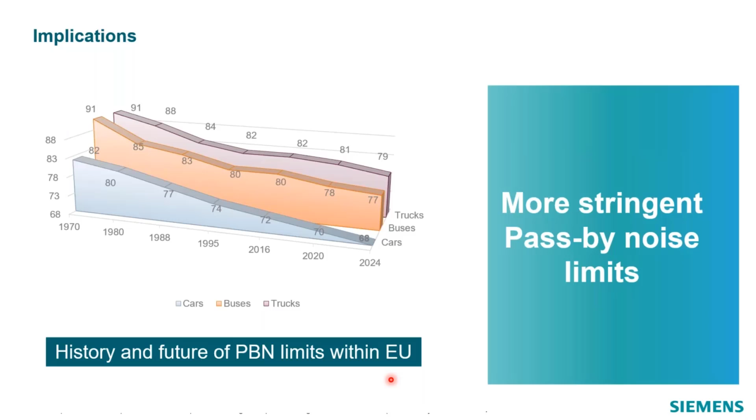Some positioning here. I think there's no big amazing revelation to anybody. Of course, pass by noise regulation values or levels have been going down over time. This is actually a fairly old plot, I think, even, but we know they've been decreasing in the EU, especially, and with changes both in different markets, worldwide markets, US regulations also adapting, things like minimum noise coming about. But all these changes really mean that pass by testing itself has gotten a lot more complex.

In fact, even the motorcycle testing I did had maybe a slightly more complicated standard where you had to reach a certain RPM within a certain range of the track, so it was almost like a box you had to hit with the RPM curve coming up, whereas most cars, you come to a position, wide open throttle, accelerate through the trap.

But of course, over time with these new regulations, there are things like you have to do ASEP testing, the number of gears, the power to mass ratio, the weight of the vehicle. All these things affect how the testing has to be run, and you need a lot more data to verify that you actually did do a good test.

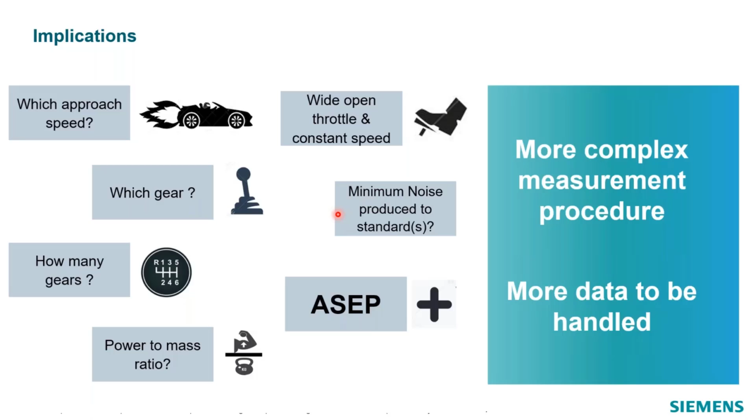Throw in there too things like new minimum noise standards, which when I first heard of that, I'm like, oh, wow, you must just have your car make its noise and say it's good or bad. No, it's a lot more complicated than that, right? There's moving tests, stationary tests, different ways to average. So the job that we have to do as pass by noise engineers has gotten much more complicated over the last few years. And really, there's a couple ways that we will break down this topic.

Like I said, we'll talk about efficient testing. That's both hardware and software, how we approach the actual data acquisition. But then also pass by noise engineering. And the difference here is that we want to be able to pick a standard, run the test, find out did we pass or fail, or what octave bands did we not pass, things of that nature.

But many times you have to do actual development work to figure out how to make the vehicle quieter, or maybe increase third octave bands if it's a minimum noise test. All these things go into pass by noise engineering. So the old put a sound level meter there and just get a single number is not going to help you get your job done in most cases. And that's what we're talking about here with increasing testing efficiency.

We review hardware for a moment because we have some very specialized hardware that we use for pass by noise testing specifically. Those of you on the call that are current Siemens customers are probably aware of this, the front end here. It's a SCADAS Mobile 05, portable system, AC/DC powered, can run on the battery for a while, has different slots to put in input modules for doing normal noise and vibration testing, field testing, things in the laboratory, etc.

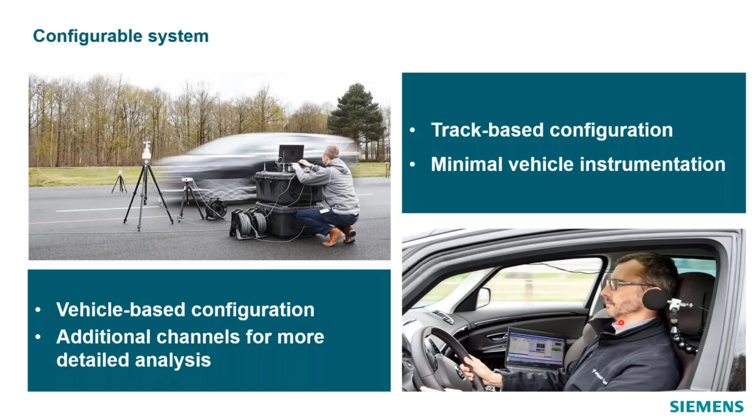Now you might say, well, but wait a minute, if the driver is actually running the test, that's probably not safe because the laptop's over on the side there. How are we going to handle that? How are customers allowing that? Well, we don't expect them to ever interact with the laptop while they're actually driving during the test. We accomplish that by actually having a wireless Android tablet application that shows up here, and you can see an example of putting it on the screen with a little suction cup, the feedback that the driver needs to run the test correctly.

Now, if we look at this bottom left picture here, you see that there's actually a target speed of 48 kilometers an hour in this test that he's running. The arrows are both green because he's within the tolerance, probably 1 or 2 kph plus or minus. If he was to go too slow, and maybe it's indicating over here 45 kph, the arrow would be red on the top, meaning he needed to speed up. If it was too fast, it would say, nope, you need to slow down. So without having to focus on this, the driver can look at the colors of the arrows, know if he's within his speed range, know if he has to speed up or slow down.

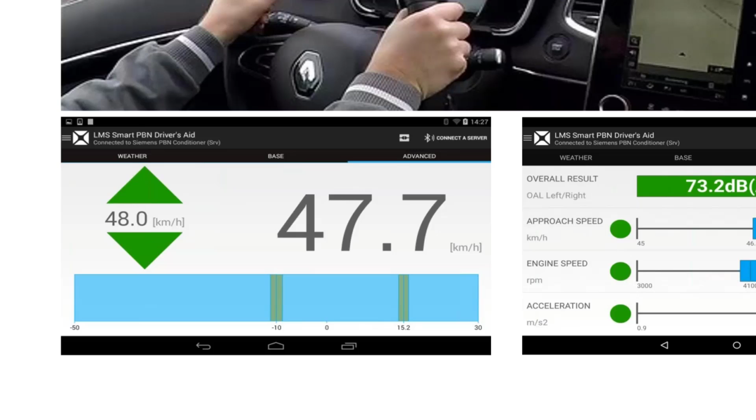In addition, when he hits the first light barrier, in this case at -50, a green bar will start progressing across. It'll literally move left to right and sweep over to that -10. And there's an audio tone that gives him a countdown, beep, beep, beep. And when it goes solid tone, that's the throttle on position. Similarly, that tone turns off at the throttle release spot. So it's a really nice tool for giving the driver the feedback they need for the test being run.

In addition, all of the checks built into the software that say, was the run done correctly? Was the kickdown point correct? Did the wind gust too high? Did the throttle off position go at the right location? All those things that go into a good test can be seen in a quick summary report every time the vehicle goes by in the track.

So after every pass, typically we're running in both directions. They go down, do a U-turn. They maybe pause briefly, the screen comes up. If it's just green and green, like shown in the middle, they probably say, yep, I'm good, I'm running this test right. They don't even come to a complete stop. They begin rolling, the system's already armed. They go back through and do the next pass.

I need to adapt the way that I'm actually driving the vehicle in that case. So it's a really nice tool for giving that immediate feedback on, was the test run correctly? Am I running the right standard?

And whether it's the person in the vehicle changing the test lab software in the laptop or somebody trackside, again, this driver's aid automatically updates and just shows that information automatically. So you can switch which test type you're running, the displays and values update, and the driver gets the feedback they need to go run a good test.

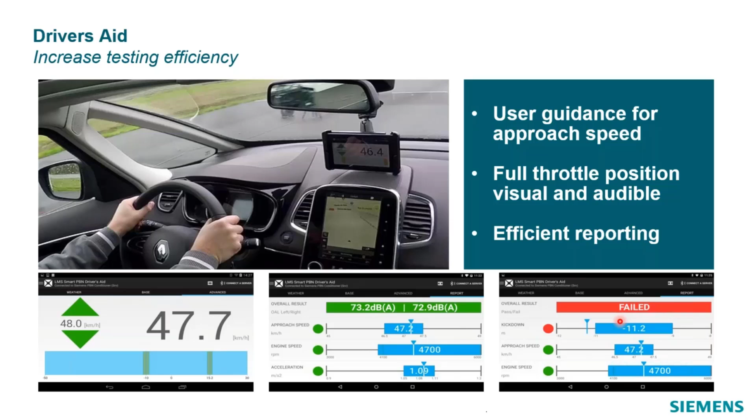So I've mentioned a couple times about the test lab software and those settings that get transferred to that driver's aid and the settings that are used to validate, was that a good test, was it run correctly, etc. I wanted to actually show that a little bit in software. I'm not hooked up live to a front end, but I can show these settings, give you an idea of what that looks like. For that, I think I will just switch over to this other screen. I think that should come forward there.

So the Simcenter Testlab software, if you're already a customer that uses Simcenter Testlab for any kind of testing, it'll look the same in that you've got a documentation tab, there's a channel setup tab, there's acquisition setup, measurement, all those things you would see whether you're doing signature testing or modal analysis, whatever it might be.

The thing that's special and different in pass-by are the parameters tab down at the bottom, and then the validation tab towards the end. That I really can't show today because I'm not taking live runs that I can show the sorting, but we could do that as a follow-up for anybody if they want it.

But in the channel setup, pass-by is pretty straightforward. I've got a couple tacho channels, one for engine speed, one for vehicle speed. I've got two DC channels. One is kick down for the pedal. So we normally just use a small fiber optic sensor with a piece of tape we put in the back of the pedal. That works really well as far as an analog setup. Like I mentioned, that could be done via CAN bus where you've got to get to 100% throttle.

The light barriers are a DC signal. You'll notice though, even though we have two light barriers, one at the beginning, one at the end of the track, there's still only one channel. And I'll show in a second why that is, because they get summed into one single DC input channel for us. And then my two microphones.

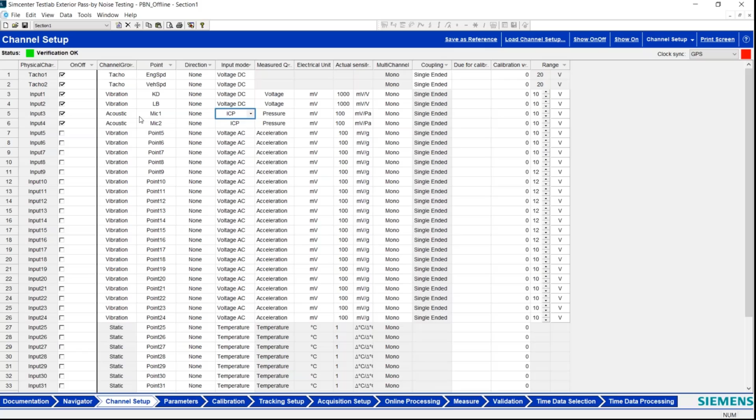But if we look at some specific pass-by information, this is what is probably new to somebody, even if they've run Simcenter Testlab, but never pass-by acquisition. Right away, you'll notice this is showing a specific test. In this case, it's a standard ISO 362 from PAST. It gives me, okay, what's the microphone position that I need to have? What's the distance to the center line, the driving conditions, the measurement, the averaging, all of that summarized on this table.

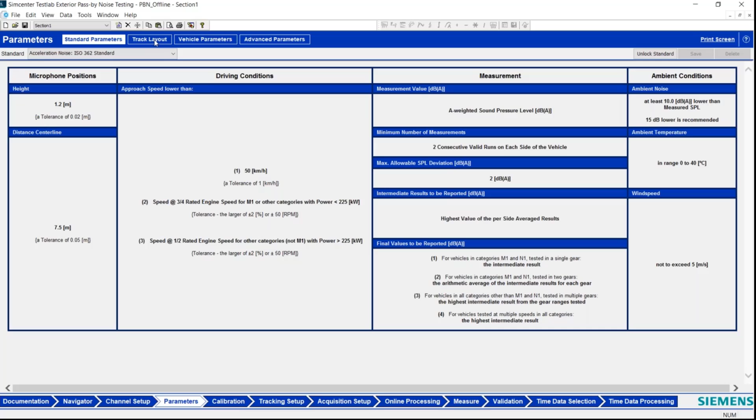I'll come back to this in a moment though, because I wanted to show a little bit of the behind the scenes setup that really is done one time, but also relates back to what we're looking at in that channel table. So if I look at the track layout, normally this is something you set one time for your track, but maybe you've got a portable system, you go to different tracks, or you've got a summer and a winter track, you might have to adapt this and save it into 2 different templates, something like that, totally possible.

But you can see that essentially it's saying, okay, give me a direction 1 and a direction 2, and then that defines left and right microphone. And if I look over here at the bottom right, all I'm really doing is picking which microphone is left or right when I'm in direction number 1.

And then we automatically switch those and label them left or right, depending on the direction the vehicle is going. The way that we know the direction the vehicle is going is from our light barriers. So I picked that light barrier DC channel that I mentioned, but I've got a setting here for, we use a different pulse level depending on if it's light barrier 1 or 2.

So again, based on the direction number 1 and my 2 light barriers, I tell it, okay, I get the higher voltage for light barrier entrance and the lower at exit in direction number 1. So then when it sees a test where I get the lower voltage first and the higher voltage second, it knows that I was running in direction number 2, shown in the diagram up here. So once I've done that, we automatically do the direction detection.

We flipped around the left-right microphone indication, and then whenever you're looking at the data later on, you can overlay all your left microphones and it stays with the left side of the vehicle as you would expect. So I think it's pretty obvious, but a really important thing you want to have when you're doing the analysis. And it gives you the efficiency, of course, of running in both directions.

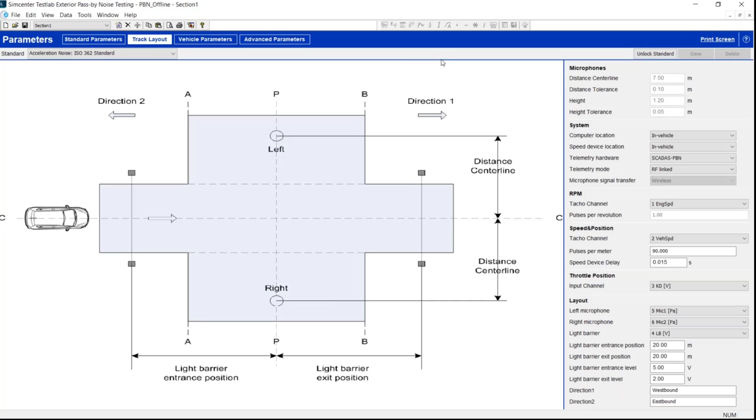There's also a vehicle parameters tab up here. Now this is one where customers may interact with this much more often. In fact, I'd argue they probably do have to, based on the actual vehicle being tested that day. Now, if we look at this, even the data here is going to change based on the standard selected. But there are some things calculated for me automatically.

So for instance, if I come into this test for a 362 and I say, oh no, my max rated engine speed in this vehicle is 4,500 RPM. If we watch the values over on the right, when I make that change, it says, oh, okay, then based on your gear ratios and other information you've entered, the target approach speed is now 36 kilometers per hour, 35.9, with a target approach RPM of 3375. So these are done automatically.

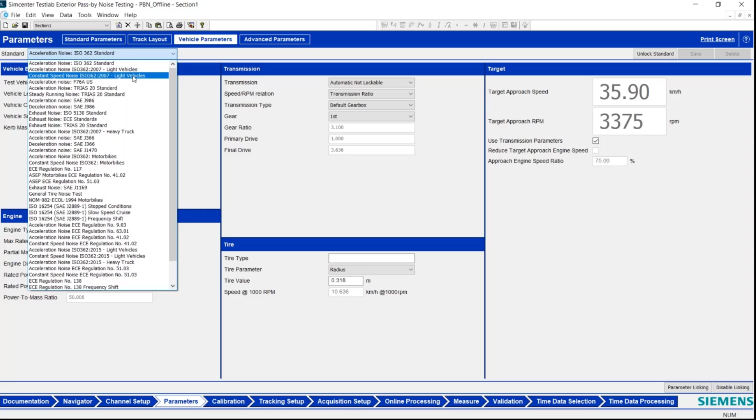You've got the option, am I using the transmission parameters or not? Or do I just want to override this and type in a number? I can unlock it and put that in there for some reason that way. But if I go pick a different standard, like let's say the newer ISO, like here's a light vehicle. You'll see that I'll get a few different parameters, like the curb mass over here. And now that test may be affected by not only engine speed down here, but like the mass of the vehicle. So if I make that 2,000, that can make a change potentially.

Oh, you know, I actually meant to get the, sorry, I'm driving this from a distance. There you go. I knew I'd get there eventually.

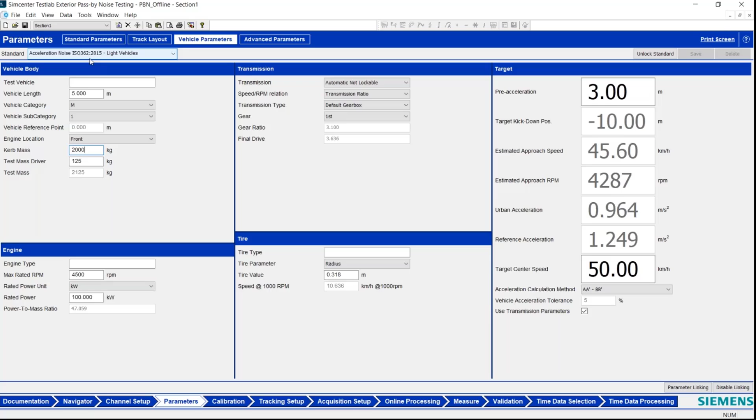So this is the one I meant to show. So now, because I've got information like the mass, the power to mass ratio. So here, when I change the mass of the vehicle, that will change my approach speeds and estimated acceleration values. But you get the idea that the data I put in for the track and the vehicle combined with the standard itself changes the data that I'm targeting, as well as what gets sent to that driver's aid on the tablet, and the data stored and the averaging method used and all those different things.

If we talk about other standards here as well, you can see it's quite a large list, and a number of the newer standards, like say minimum noise, are included in here. So I've got tests for like the ECE 138 regulations for standard and frequency shift. There's other noise tests in here for the different noise standards used in the US. We also have a tool that's available in the software as well. If you're aware of the minimum noise test standards in the US, there actually is an FMVSS tool you have to use from the Federal Motor Vehicle Group to compute your actual minimum noise values.

And so we have the set of templates set up to acquire the data, and then you export it in a specific format, and we have a tool to do that. And once you've done that export, then it imports into the FMVSS tool directly and does the processing for you. That's the way, in that case, we do the reporting, because you have to use their tool to actually do that report itself. That's also implemented as a standalone export executable as part of the software.

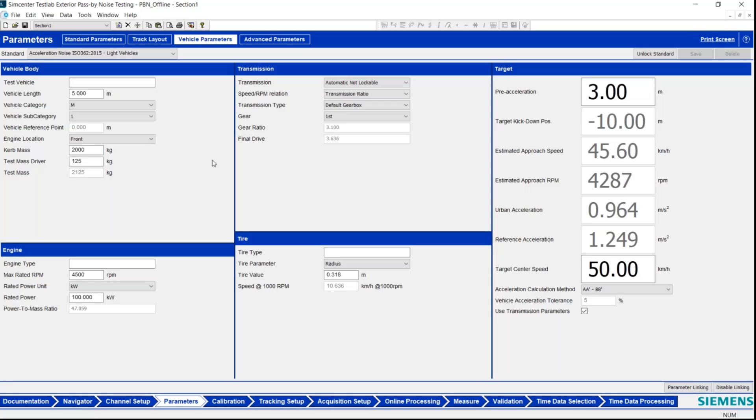I did skip over, I didn't really talk about it, there is an advanced parameters tab. This gets quite busy, but it's things like tolerances. What's the position tolerance you want to use? Normally this is written into the standard, but you could decide to be tighter or looser with that based on your needs if you're doing development tests or regulatory testing.

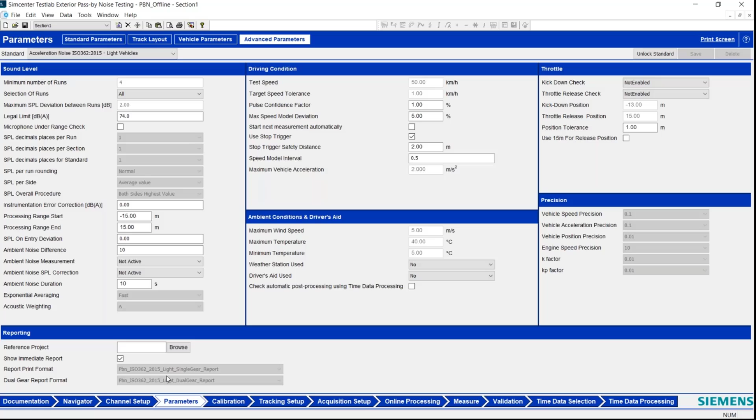Lots of information on how the actual averaging is done. Are you allowing the 2 dB over or under based on how some of the standards are stated? There's some reporting defaults down here, the defaults you want to use for, we have like Word document report templates that can be user edited and changed for logos and content. So all those kinds of things as well.

So then really this main standard screen is honestly what you would interact with for the most part, because track layout is probably fixed. You may go in and change vehicle parameters. It is possible for those of you who are, I'll say, maybe high-end test lab users, you can actually link vehicle parameters to information that you put in on the documentation tab.

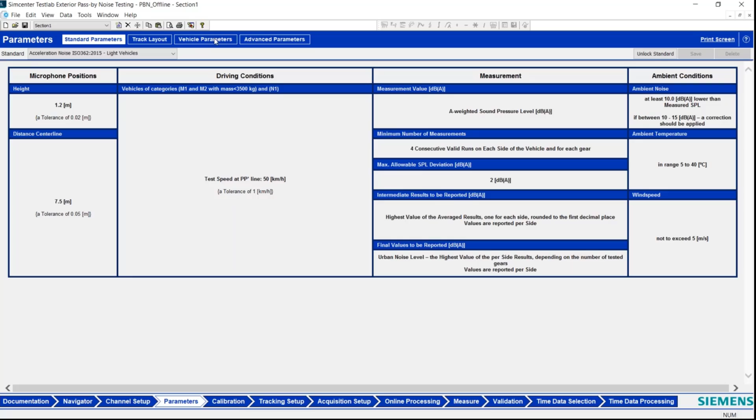So it's possible to set up your templates such that you define maybe the vehicle mass here. I showed editing that mass. And that can automatically, when you set it here, transfer into every one of the standards that you pick, so that you don't have to come into the vehicle parameters tab and change it manually. So there's a way to link those test lab documentation parameters to the actual test parameters that are used to calculate all the values for a good pass-by test.

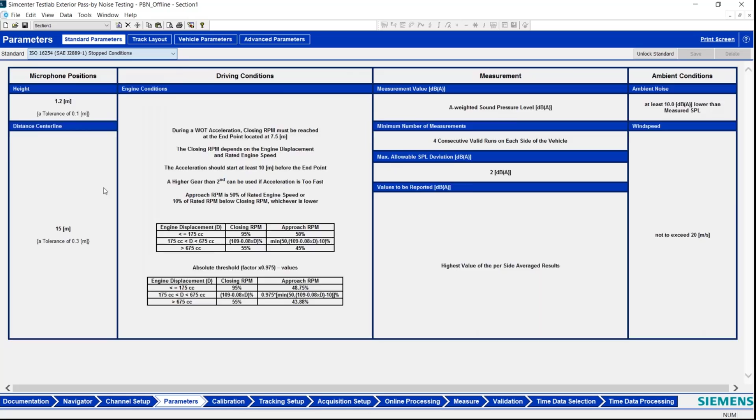But good. Taking a quick peek here at the questions to see if we had them come in. Do we need a standardized road surface to measure? Yeah, it's actually a very good point. So my understanding is that most of the regulations can require a specific road surface, and there's a very specific test that has to be done to verify that the porosity and the sound absorption reflection is within a certain specification. It depends though on which standard you're actually running your vehicle to.

I know that some of our customers have gone through a lot of effort; I've even known sites that had to have the road repaved 2 or 3 times to get the correct values for that test. But again, that depends on which standard you're running and whether or not they have in that standard a requirement for a specific road surface.

The other reason I know that's important, we've had customers that have had to come back and clean their asphalt after a certain amount of time because the pores got filled with dust from a nearby farm field or something like that. And so then that changed the characteristics as well. So that can be an important factor, the road surface itself, but it varies by which standard you need to run. So good question. Thank you.

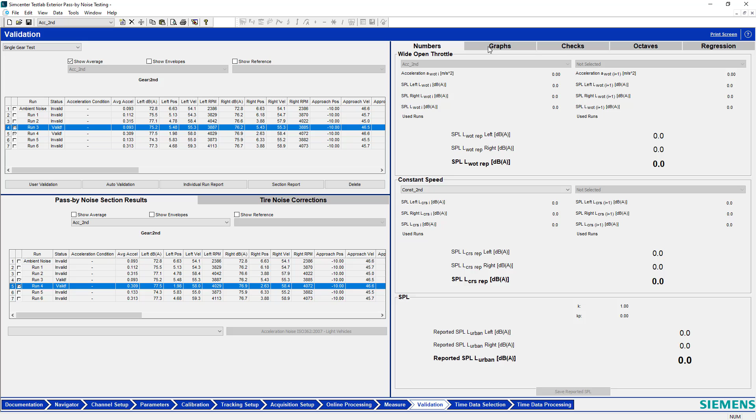Let's see. Oh, I was going to show one last thing just to point out the concept, the way the validation tab works. So when I've run multiple passes, I should say, of the vehicle back and forth for a given test that I'm doing, I'll get a table that's built up in the upper left that shows which ones were automatically valid based on the checks, and then which ones were flagged as invalid because some check was failed. Turning those on and off even manually will automatically update graphs on the right.

There's everything from the numbers tab, there's graphs that show the overall levels, positions, things that you'd expect for the pass-by testing. If you had checks that were required, this would say, did you meet them or not? So every individual run you picked over on the left would then show whether or not that run had valid checks or which ones may have failed, octave plots, etc.

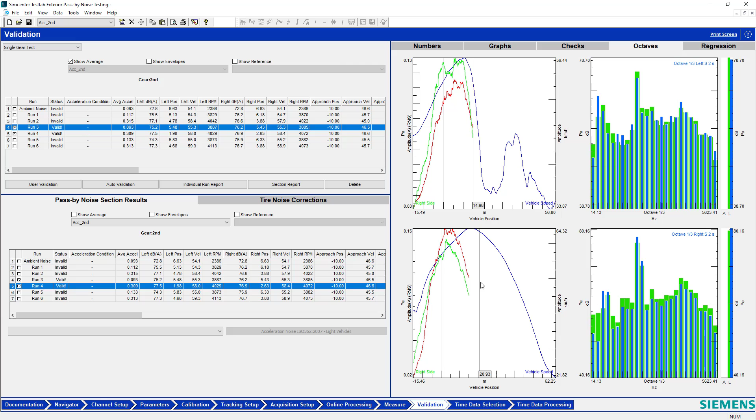Ultimately, once you've sorted these runs and made sure that the ones that you want to keep look good, you can overlay them all, make sure they're consistent, that you don't have a very wide gap and variation in them, then you can actually do the quote unquote reporting, where you'll actually get the numbers themselves. If I switch back for a second to the actual presentation, this has got a graphic that shows that a little bit better. If I just zoom in here for a second.

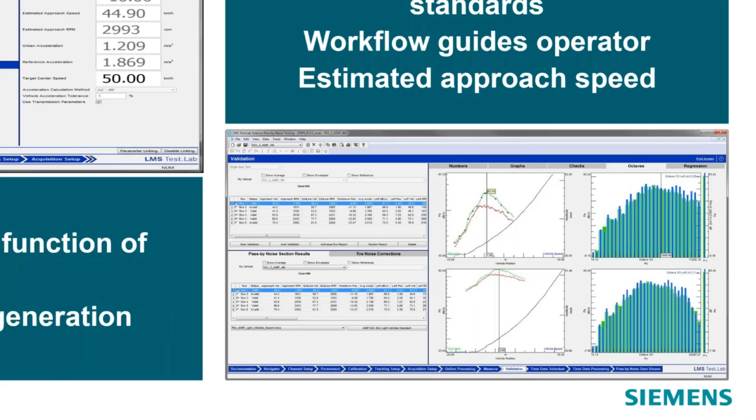So this is an example of what I was just talking about, where I've got a set of runs on the upper left. You can see that the second and last one were invalid. They failed some check of some kind. But I have 4 valid runs, and for this standard, that was enough to actually do the processing.

In this octaves plot then, it's showing the one run that's highlighted. If it's a 2-gear test, sometimes there'll be multiple tabs down in the bottom section where you can look at the different gears that were running, what the values were there. And then ultimately, there's a little pull down to pick the report you want, and then you click the button like where it says ASEP ISO 362 light vehicle standard, and it dumps that out to a Word document report.

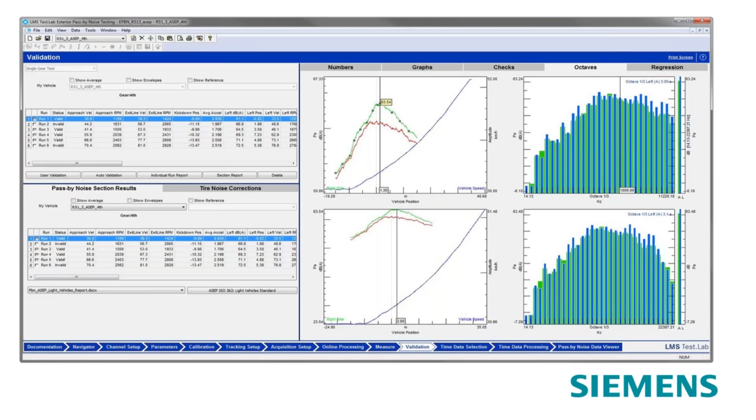Nice and quick for looking at all the data, figuring out what's important, and sometimes you'll get valid runs that look like they have something very wrong with them, and it could be maybe a plane flew overhead or a bird made noise. You never know always, right? I always appreciate the ability to overlay all the runs very quickly and see if I've got one that's very different than the others, and then I'd say, well, I'm going to throw that one out of the average because it really doesn't make sense. It doesn't follow the trend of all the other ones. Nice tool for doing that sorting.

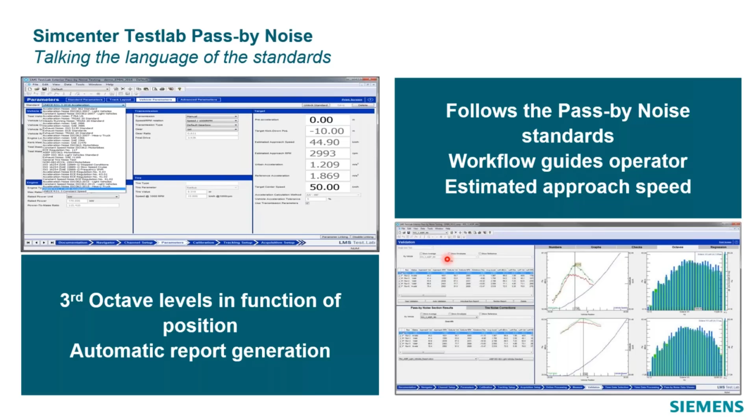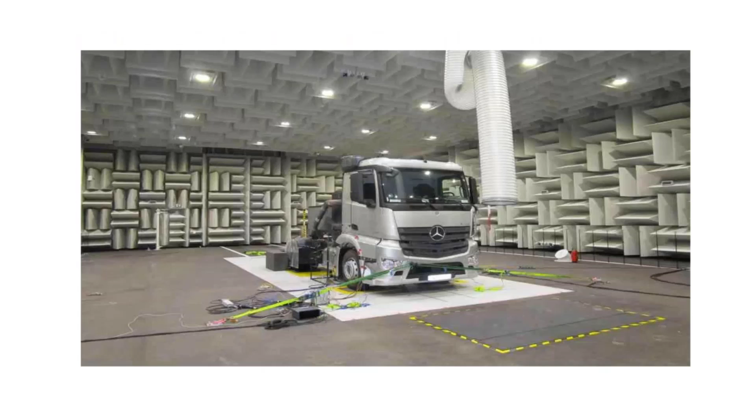You need at least, I would argue, 5 meters of space from the center line of the vehicle to the microphone tips. And I say that because we've had customers that were building indoor pass-by facilities, and they found that even though we can actually adjust in the software to predict from the 5 meter measurement to what it would be at 7.5 meters, and that can be done quite accurately in software, getting much closer than that accuracy goes down. And there were customers that found having the microphones too close to the wall, to the wedge tips, also had a big negative effect when they were comparing indoor to outdoor data.

So generally the rule of thumb is you need at least a meter of space behind the microphones, in addition to, I'd say, the bare minimum of 5 from the vehicle center line to the microphones themselves. So you're already in like a wedge tip width interior of the test cells in the 12 to 15 meter range, which is very large, of course, right? I've even seen test cells that are approaching 20 meters across. Similarly, end to end, not as big a deal, but you'll also see that the microphones are spaced like every half meter or 1 meter in this test cell.

And what we do is take all those microphones simultaneously and then stitch together based on the speed and computed position of the vehicle on the chassis dynamometer. We stitch the time data together from the microphones and come up with a composite overall level curve. We've got really good information and background that shows that this can be done quite accurately and will compare very well to outdoor pass-by testing, with the possible exception of tire noise.

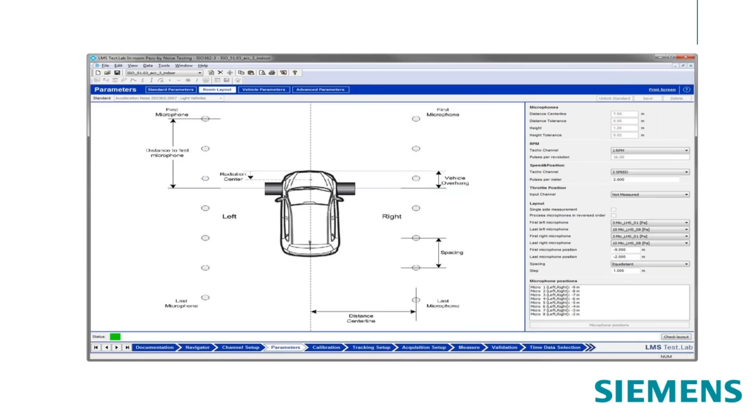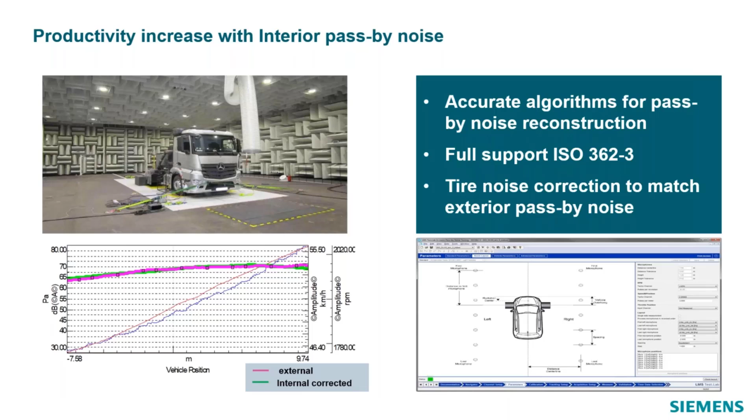But you'll even see down here that essentially the look and feel of the interior pass-by noise software is really the same, but in this case, I'm defining an array of microphones, telling it what the signal is from the dyno to get speed, engine speed, all those kinds of things you'd expect. Overall, it's essentially the same process and very straightforward, and can be run very quickly and very repeatably if you have one of these large indoor hemi-anechoic test cells.

In addition, we've got some techniques and technologies that help determine contribution of sources. But in the past, when I did this on motorcycles, we just used masking, right? We had our giant muffler we would put on, a giant intake box we would put on.

We'd wrap the engine, the mechanical engine of the motorcycle. It was fairly easy to cover it with sound absorbing material. And then we'd essentially make it as quiet as possible. Then we'd remove like an engine cover and then an intake and then the big muffler. And from those changes, we then compute the contribution of intake versus exhaust versus mechanical noise.

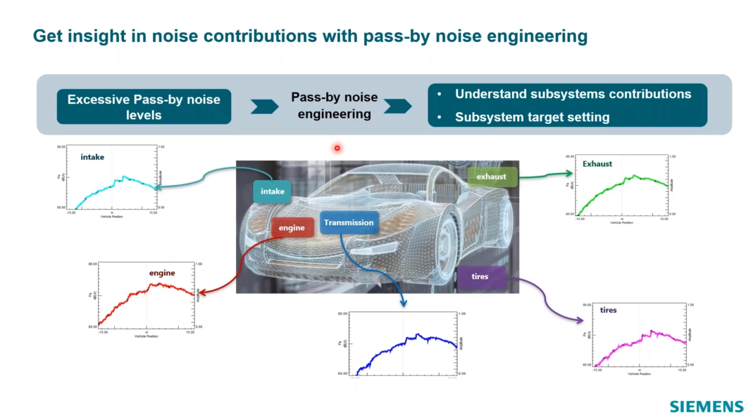The automotive people are very familiar with that, doing that as well, I think, in the past with big mufflers, intakes, etc. But that can be time consuming and not all that accurate sometimes. So we have a number of techniques to actually get contribution from systems without having to actually do the masking. And we do that through some airborne source quantification, or ASQ methods, where I can actually measure near field transfer functions, like with acoustic sources.

And then by adding those back together, we can see how close we get to predicting the real level that was measured in the outdoor test or the indoor test. So it's some interesting ASQ and TPA style techniques we have for doing pass-by noise engineering and really understanding the contribution.

And if we take that one step further, we also have some innovative things we've been doing to try to expand on that, where when I know these noise transfer functions and the contribution of different sources, you could then potentially start quantifying components, intakes, mufflers, maybe transmission energies on a bench test, and then take the component with high-level vehicle information you had measured or broken down from previous tests and put that back together to synthesize a potential pass-by noise result on a vehicle that doesn't exist today by putting together those different pieces of information you have.

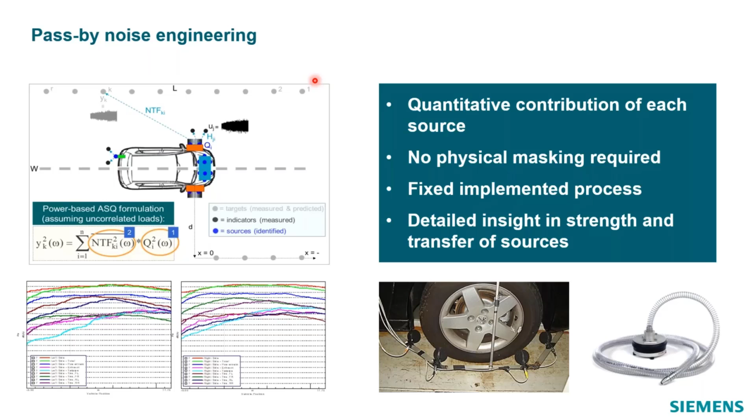So this is not like a push button in Test.Lab where you say, hey, predict my pass-by noise level and we spit out a number. This is more of a research, high technology thing that goes from this pass-by noise engineering, which is something we can deliver today in a project sense, and taking that to the next logical step. And we're working with some lead customers on doing this type of work to actually synthesize or predict pass-by noise levels based on breaking down transfer functions, measured values, even predicted information, maybe from a sound simulation, etc.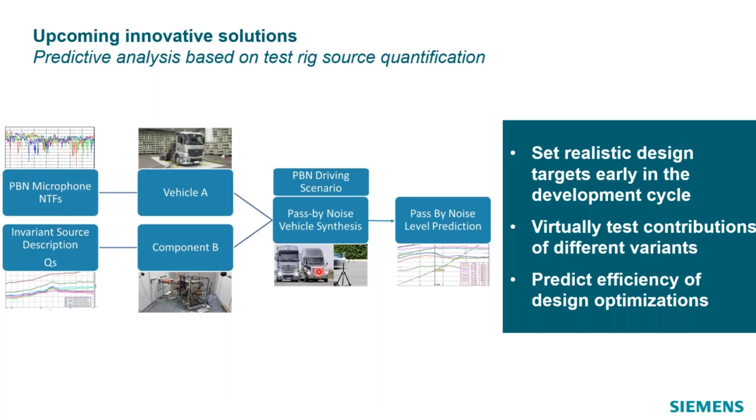So really, to summarize, if we wrap up the different slides that I've gone through, we really do think it's a one-stop shop for any pass-by needs. We have customers that use the system today for just day in, day out regulatory testing. They're very confident they're getting good answers, that it meets the certifications for any ISO or US standard, et cetera. The standards are built into the software. They can tweak if need be, save their own versions. They literally pick it from that pull-down list that I showed you.

They tell the driver to go. The driver sees the new information on the driver's aid, and they start going back and forth. So they're doing tens and hundreds of runs in a day to get lots of different testing done at any given test track. But the same exact hardware that we're using for regulatory testing can very easily be used for real pass-by engineering, where you're adding other channels, need to measure some other information. Maybe you have to plug into the CAN bus to get some vehicle parameters, something like that.

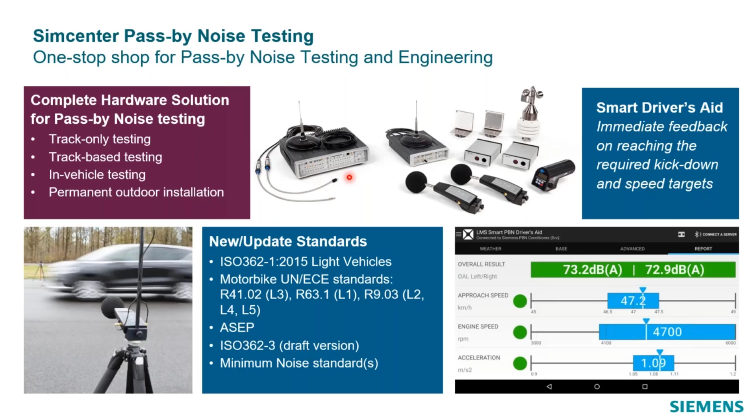Because we can do the vehicle-based system with the wireless microphones, putting that front end in the vehicle, even if the driver isn't the one running the test, that still allows us to get those extra channels and information to help you make engineering decisions for your pass-by noise engineering. That wraps up the slides I wanted to cover.